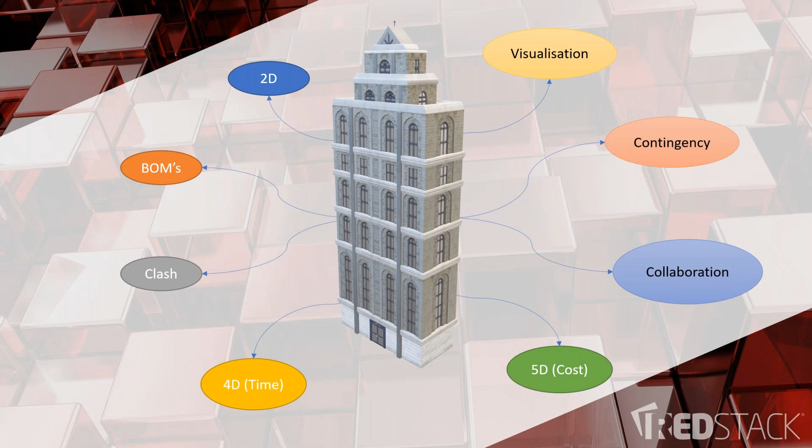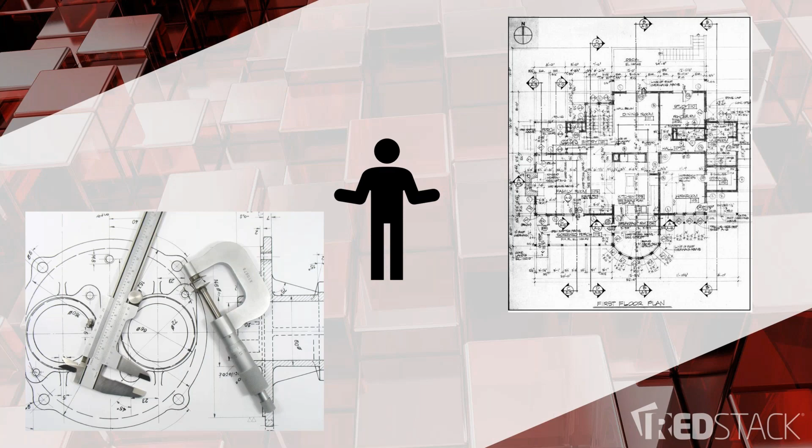With InfraWorks and Civil 3D, we can use Civil 3D to import the InfraWorks model, so all of the existing surfaces plus all the proposed surfaces will come over. The road alignments, roundabouts and bridges will come over, and that way your Civil 3D model is, in milestone terms, probably already 10 or 20% done instead of starting from zero. So for all the civil people on the call, have a look at using InfraWorks and Civil 3D to generate some of these models.

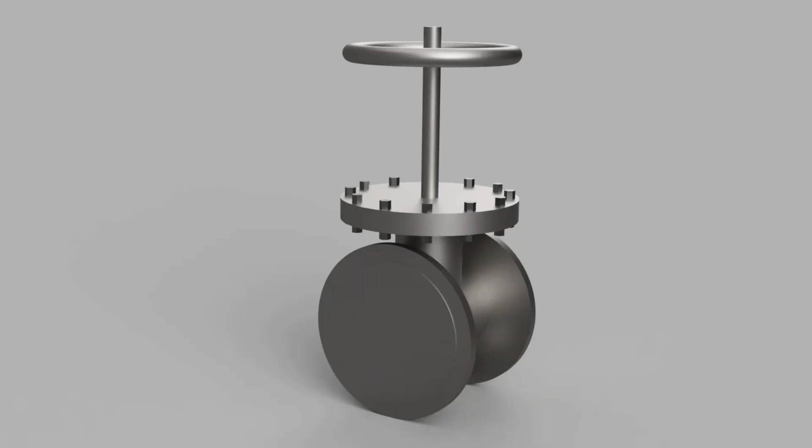This is a 3D model of a valve that I did in Fusion that was converted from 2D to 3D, and that is something that we will cover in the session in a few minutes. I will actually load it up and show you how that was done as well. I've got a rendered model there of a cast iron valve. I don't have the bolt details on the flange just yet, but once I model it, the 2D documentation for that comes out for free, basically.

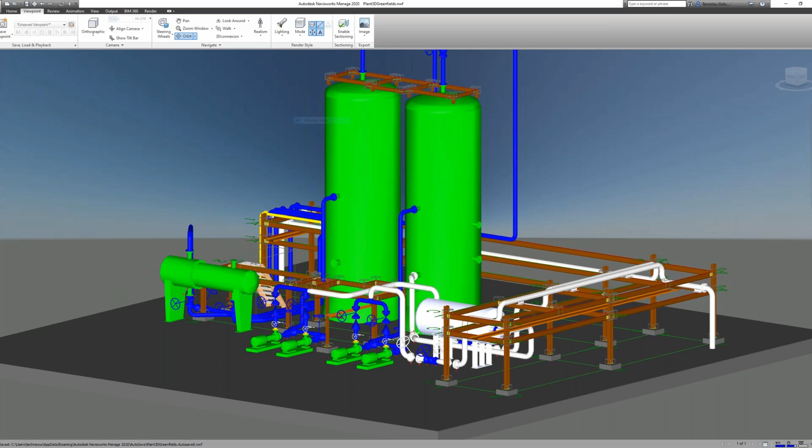And then for the pipers on the call, as I mentioned before, if you're using Plant 3D, we can link up all the piping, equipment, structural and MEP models all together. And subsequently, why we bring it into Navisworks is doing things like a clash. So you can see here that we found a clash in that piping model.

It's a piping elbow that's clashing with a steel beam there, and then from that we can determine through, you know, meetings or discussions, just going up and tapping someone on the shoulder, do we need to move that elbow out of the way, up or down, or do we need to move that steel beam?

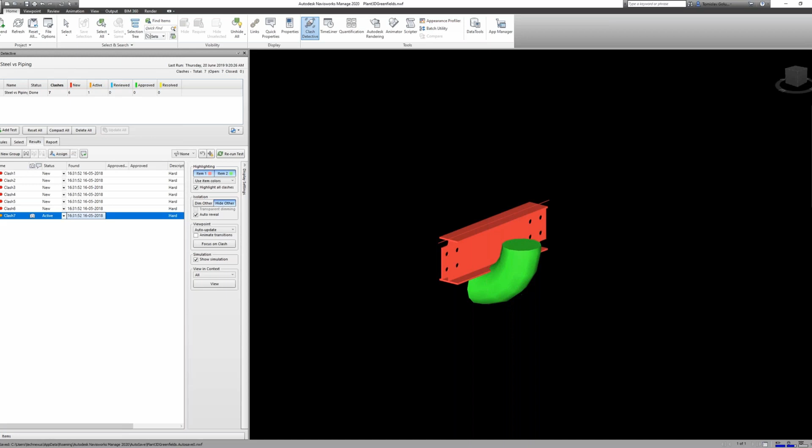So again, these decisions can be made before anything happens out on site, whereas if we weren't using Navisworks and we didn't pick up this clash before we went out on site, you might end up with a hefty bill at the end of the day, trying to get someone out there with a gas axe to cut and shut bits and pieces. So, excuse me. So let's jump into a live demo now.

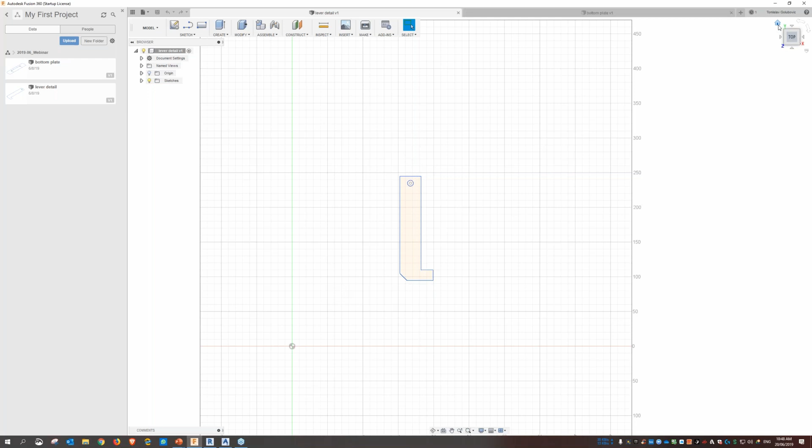So as I mentioned before, Fusion is one of the tools where if you already have items in 2D, we can go to 3D pretty much straight away. So I've brought in just a 2D drawing of a lever. Now, using some of the tools in Fusion, I can extrude this, and then I can say let's make it a 5mm thickness in here, and I can nominate directions, whether it's one side, both sides, and it's a new body. And now we have a 3D model of this as well.

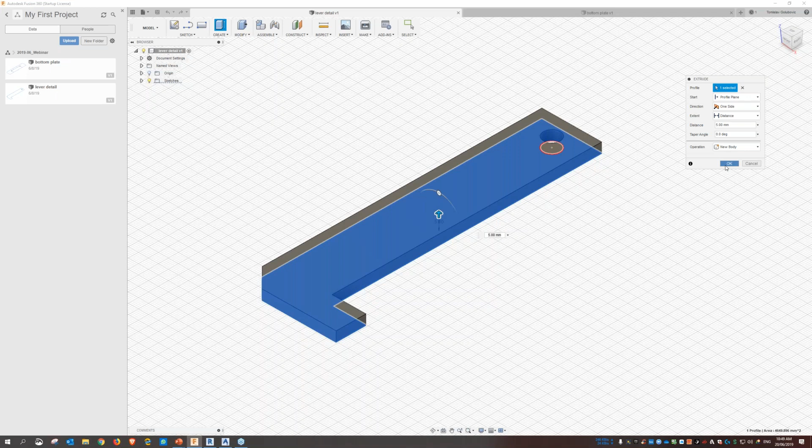There is also, if there is a need to do simulation in here, I can put loads on this, and that way Fusion will give me, I guess, the strengths and the weaknesses of this part depending on the loads and depending on what I need to do.

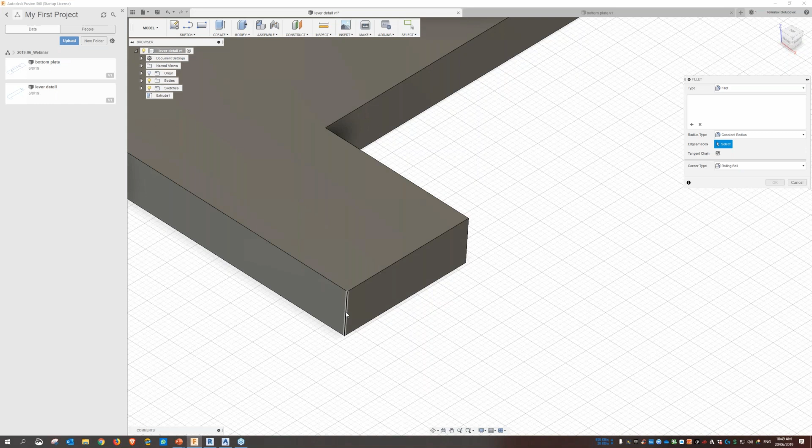So plus as well, I can just as easily come in here and put a fillet on this, so I don't need to play around with 2D drawings, and I can just use the functions here. I can type in a value of 5, and you can see that automatically that has filleted around there. And again, I don't need to play around with any 2D drawings. I don't need to worry about what's happening with other views.

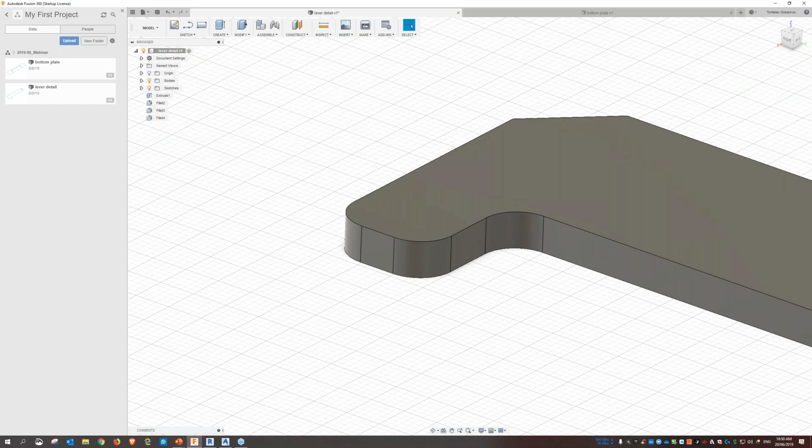So I'll just do the same for this other side, and I'll type in 5, and then I'll do another one again just in here as well. So I'll put a fillet in here and make that 5 millimeters. And you can see how quick and easy that is to generate and to produce, and subsequently we can make a drawing out of that as well. So I'm just going to close this one off.

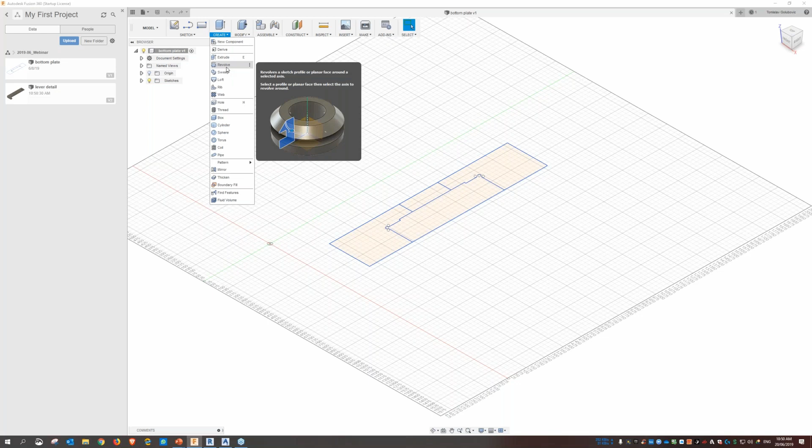And then this is, again, a similar sort of thing. I've got a 2D section of an object, and we need to revolve it. So under the Create tab, I'm just going to go Revolve, pick the region that I need to do. And actually, before I do that, I just need to do a sketch line. So I need to put an axis.

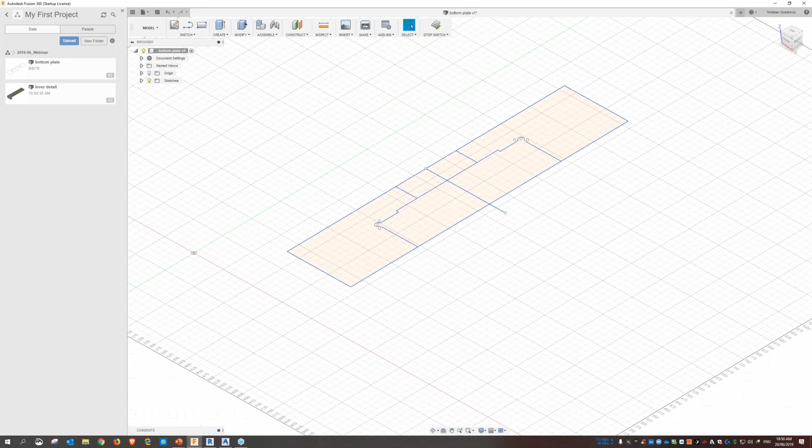So I just need to draw a line through here, stop the sketch, and then I need to jump into the revolve, and pick what the axis is, and then you can see there that we do have our 3D model of this bottom plate as well. So subsequently we can make a drawing out of that. And to show you that, I'm just going to save this.

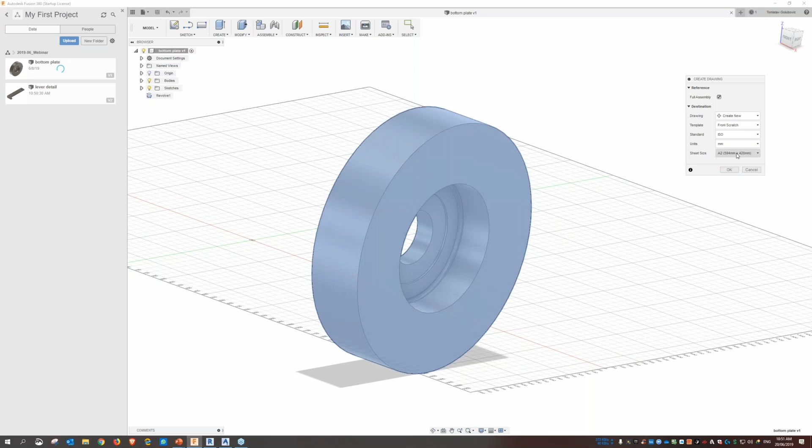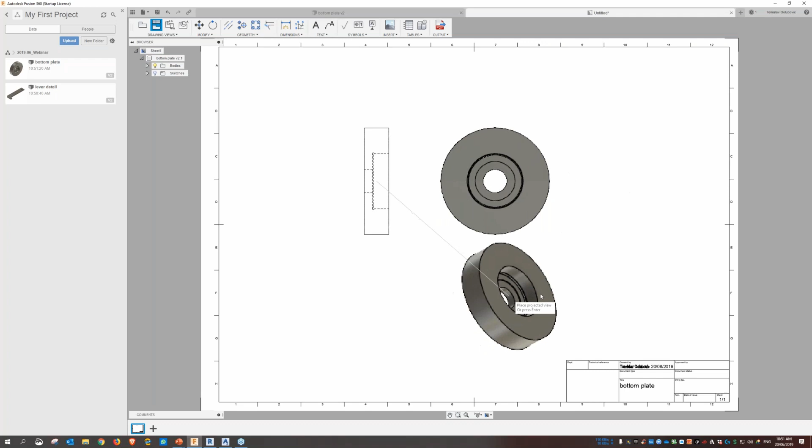And then you can see here new drawing from design, and I'm going to put it on an A2 sheet. And then Fusion's going to ask me where the views are, so what the base view is, and any projected views as well. And from that, you can see that once I place these views on here, I can do an isometric kind of view there as well, and then we can go through and dimension and name them there.

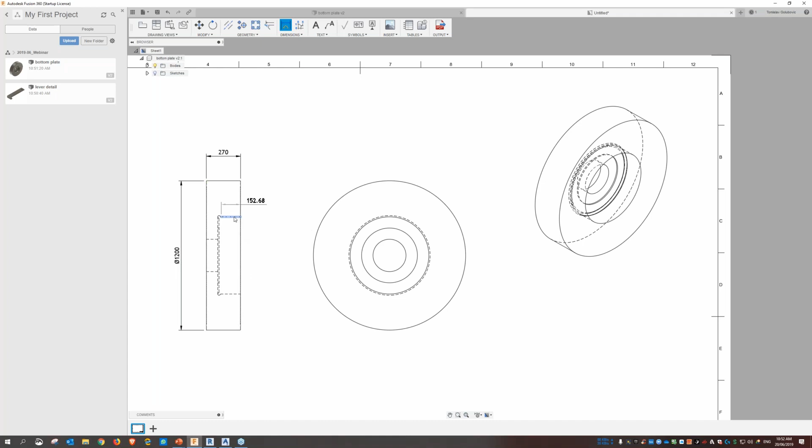And you can see we can set up all of the different options, so whether we want to see the hidden lines or not, we can just move them around. We can also draw center lines, center marks, patterns, dimensions, so I can go through and just start dimensioning those. And you can see, because it knows it's a cylinder there, we've got all of the values, like it's put in the diameter symbol in there as well. And then I'm just going to save this, and I'm going to call it bottom plate drawing.

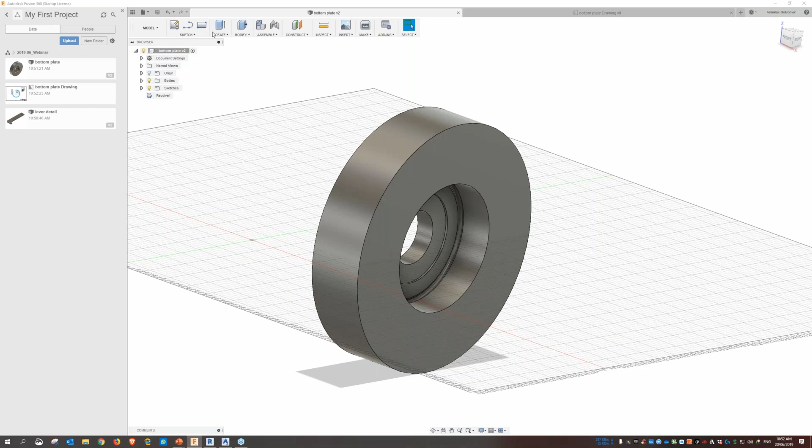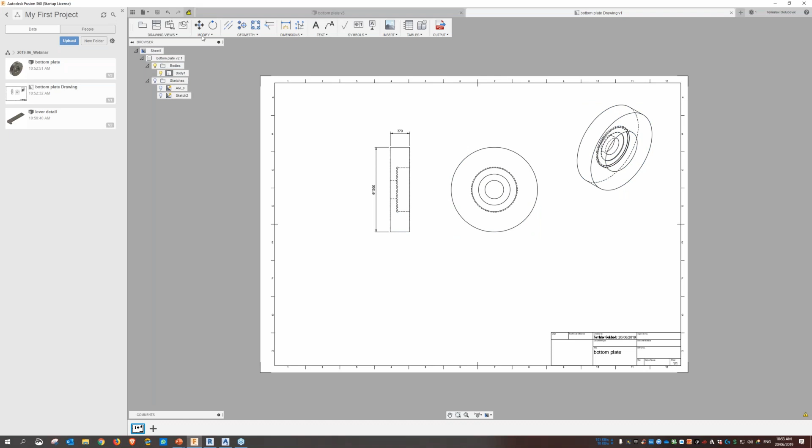And then if I do go back, let's throw in again, let's put a fillet on this outside edge here, so 5 millimeters. In the scheme of things, it looks quite small, but you can see there's a warning down here. It says we can update the model. So you just need to go through and update them. Oops, there we go. And then that way we can see all of the latest changes.

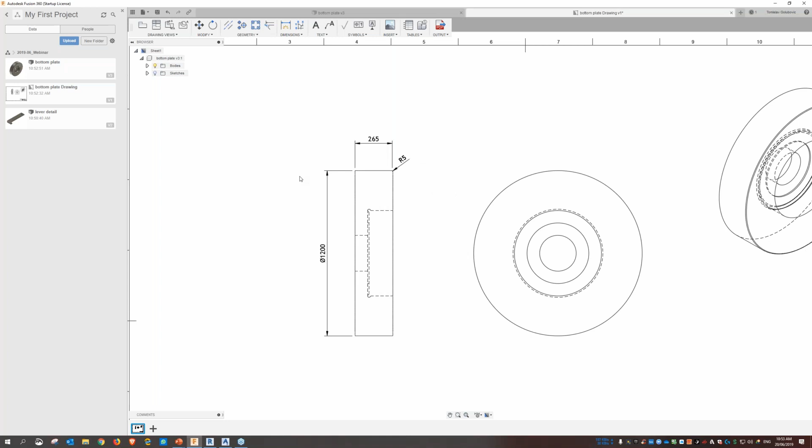Okay, and you can see here on this view that the fillet has appeared on the drawing, and let's see if we can grab that as a radius, and you can see that it tells us that there's a radius 5 fillet on there as well. So again, think of this 3D model as your central source of truth. Whatever we do to this, our drawings will follow suit and they will update as well.

But also, don't think of it from just a drawing phase. If you're a Fusion user, you've got the simulation, you've got the manufacture workspace as well. So if it's something where you're doing CAM, we can generate the tool paths for this if it was something that needed to be utilized for that. So that's for the manufacturing space.

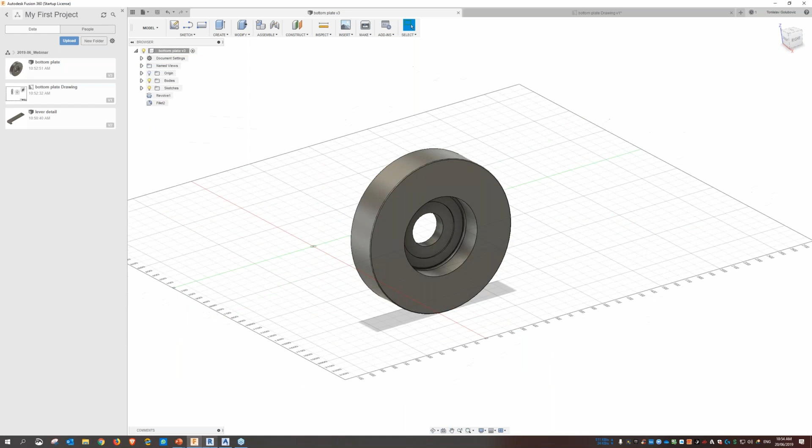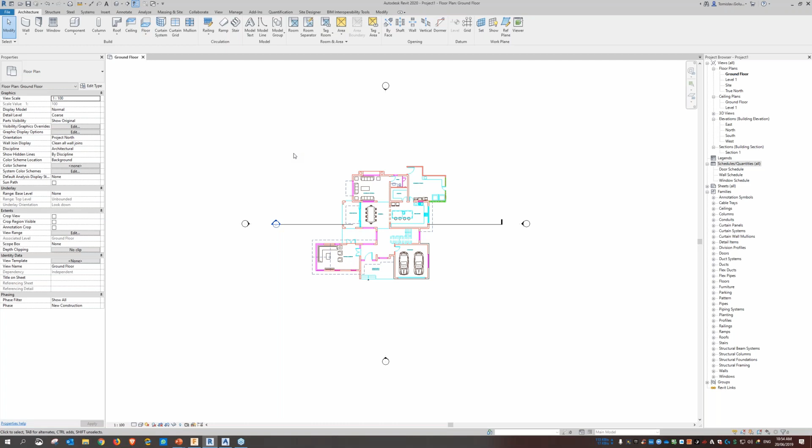For the architectural space, so for any home builders or anyone in the home, building or architectural space, anything to do with Revit, and this can be on the architectural, the structural, or the MEP side of things. This here is just basically a 2D house plan that I brought in, and you can see if I rotate it around, it's completely flat. It was done in AutoCAD. There's nothing special about it.

But if you are looking to go from AutoCAD and you already have these as AutoCAD files, it's quite easy to come in and start basically converting these into 3D. So with Revit, I'm going to place a basic brick wall 230mm thick, and we're constraining the height from ground floor to level 1, and my location line is on the exterior of this.

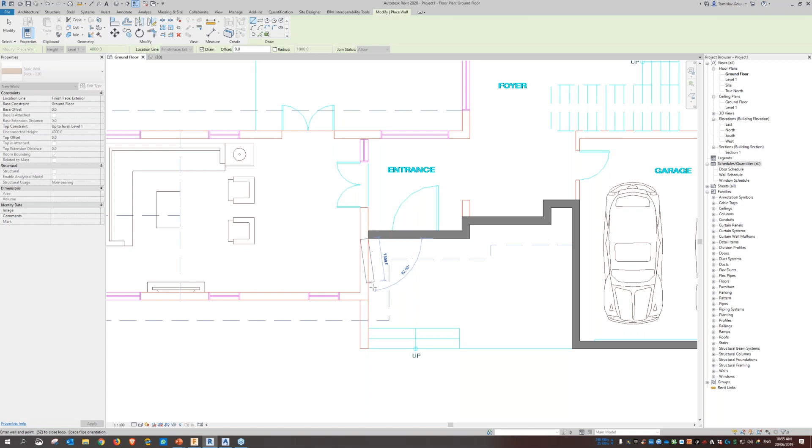So all I need to do is just start tracing around these lines, and you can see that we can slowly start building up a 3D model of this house. I'm just going to go through and do a few more points. You can see I don't need to put any fittings in here. I can just place the walls, because eventually we're going to place all of the windows and the doors separately, which is how you would normally do it inside Revit, and I'll show you that in a second. So I'm going to finish this wall here, and then I can do the same thing just to finish off the wall.

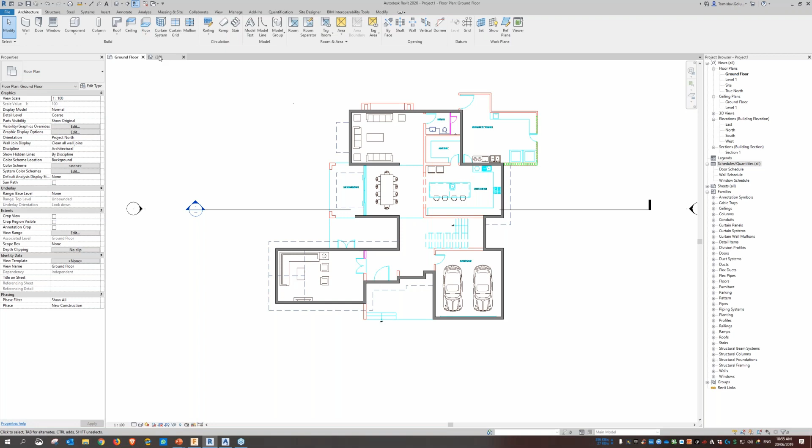Okay, and even though we've drawn it in 2D and you can't really see it, if I switch to the 3D view, you can see there's my 3D view of that house. And if I switch it to shaded, you can see that by default that Revit wall family already had the bricks on it, so you can see all of those bricks there.

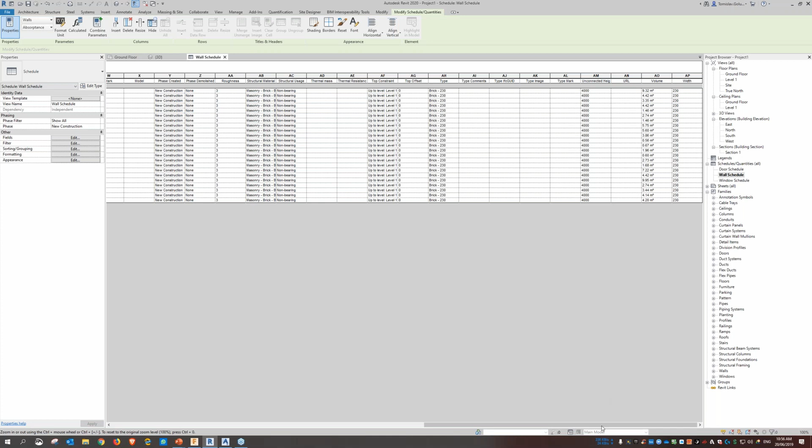Now, setting up schedules. In Revit, there are already some schedules in there, but I've set up a wall schedule. If I just double click that, I can see the area of each of those walls, where they are, what kind of family and brick, and what their functionality is, but also things like length, and if we scroll over to the right, we've got a volume in there as well. So again, you model it once, and then you might say that everything after that comes for free.

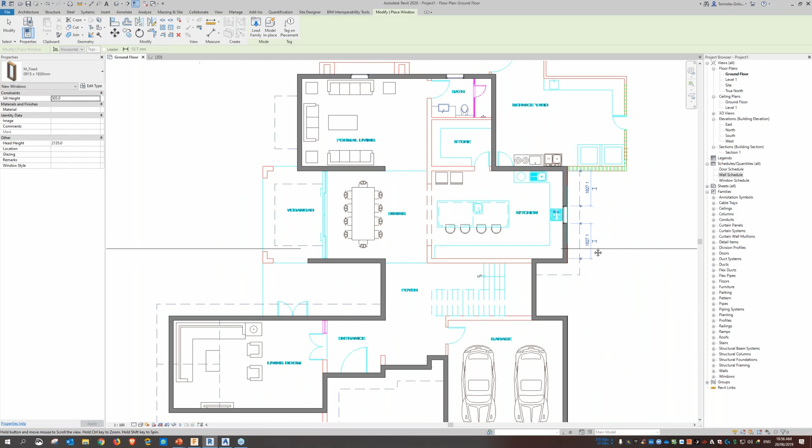So now let's throw in some windows. I'm just going to throw in a couple of windows just to demonstrate the ability here. We've got one in the kitchen, we'll throw one on this front, and we'll throw a couple here on this living room, and then I'm going to do the same with the doors. So we're going to throw in a front door, and let's throw one over on the garage.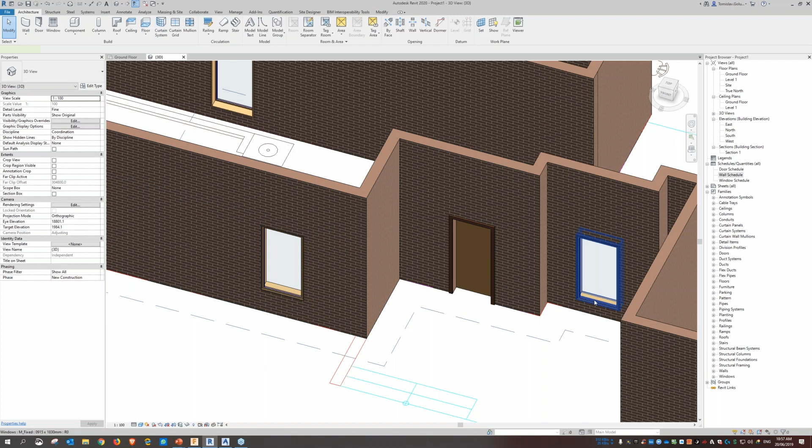Okay, so now that we've placed them, and I'll switch to 3D view, so you can see there again, they're placed at an arbitrary sill height, but if I decide to change that, if I want that to be 600 high, then you can see it adjusts itself to be 600 high as well, and I can do the same with this one over here. I want it to be 1200, and then there it is. So subsequently, all of the views will change.

But before I get into the views, if I look at the door schedule, you can see that it tells me that there are 2 doors, and they're both on the ground floor. And then the same thing for the window schedule. So we do have mark numbers with height, and obviously you can go through and adjust all of those as well. But the real power sort of comes in when we start looking at elevation.

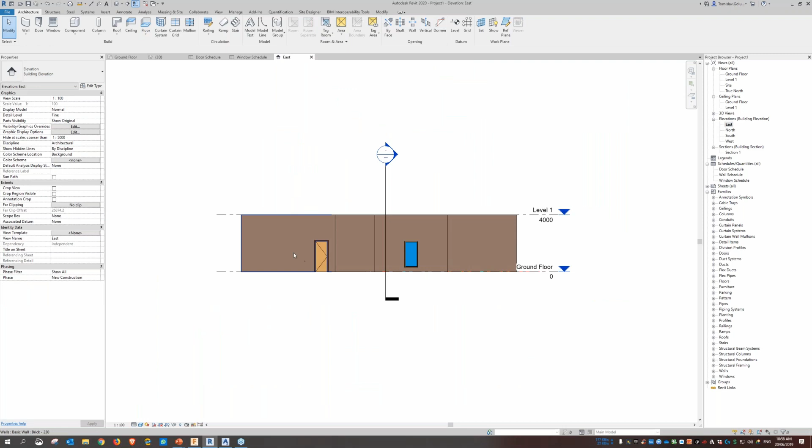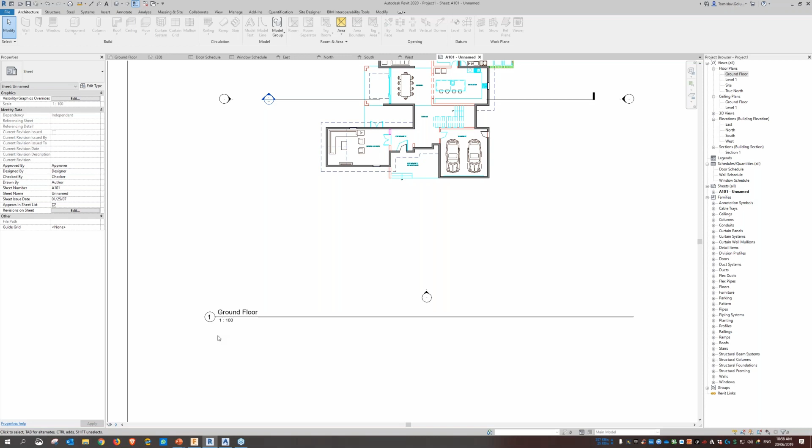So you can see here from the right-hand side, and I'll adjust the views. So you can see automatically the east view, north, south, and west is already created for you. So if we wanted to place these on a sheet, so if someone says, well, I want to see the ground floor plan, then we can place the ground floor plan, and you can see it's there at a scale of 1 to 100 on an A1 sheet.

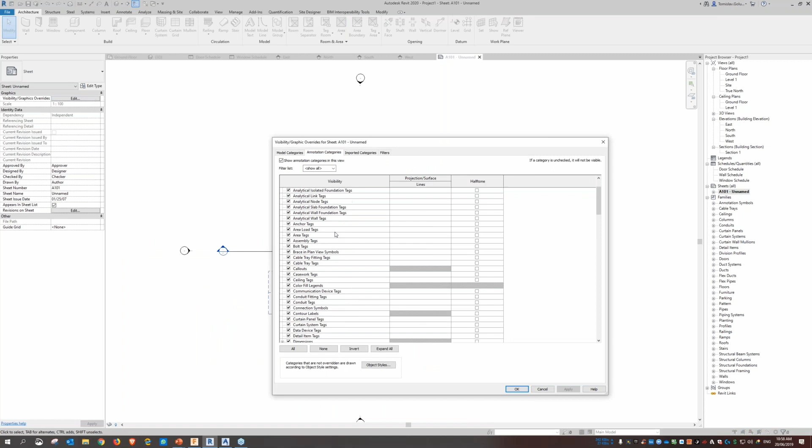So anything we do on this ground floor view will be reflected on the ground floor view on that sheet. And we do have things like turning on and off any tags or dimensions, so you can have one view with everything in it, and then each of these sheets will basically, like AutoCAD layers, turn bits and pieces on and off, and then as the model slowly gets built up, we will have a 3D model, our views, any sheets and our schedules, all basically done for free with the click of a button.

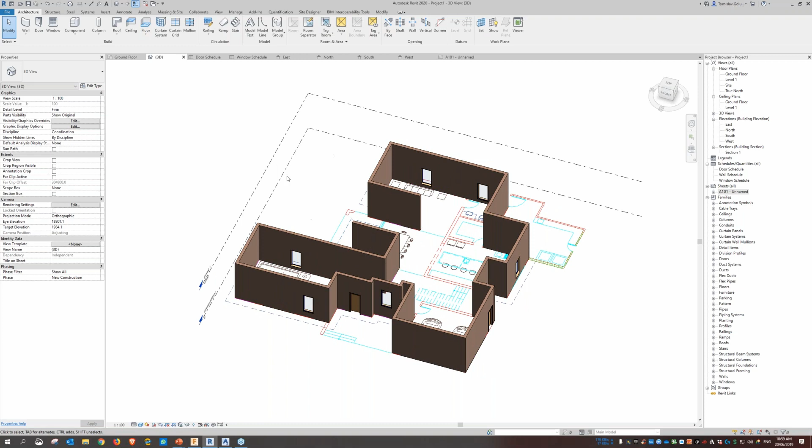So don't be too afraid of having a look at Revit if you're a house builder or in something sort of in the architectural industry. And then lastly, I wanted to have a look at Advance Steel. So for any steel modelers, steel detailers on the call, Advance Steel was a product purchased by Autodesk a few years ago now, and it's obviously made its way into the ecosystem.

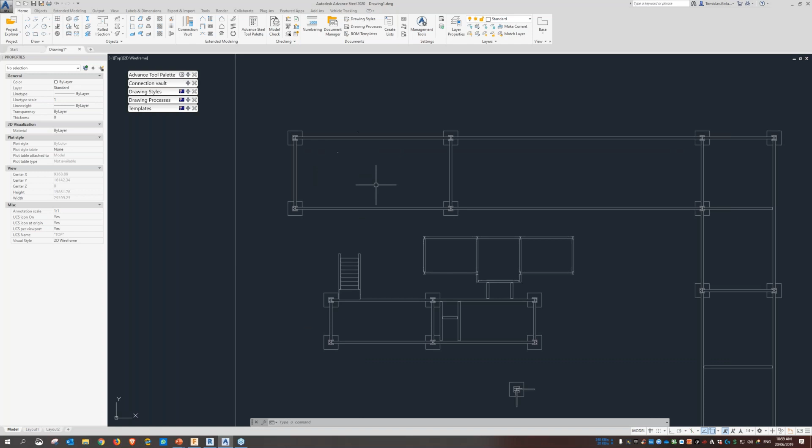But this is an example of a structural model that was made in 2D, and with Advance Steel, I can basically use this as a base to start modeling in 3D. So if I wanted to stick a column on here, I can just go to the column command, and I can say that it is placed in the middle of that point there, and you can see that even though it's not the right size at the moment, it's placed in the middle there. And if I switch to 3D, then I can see that column has come in there.

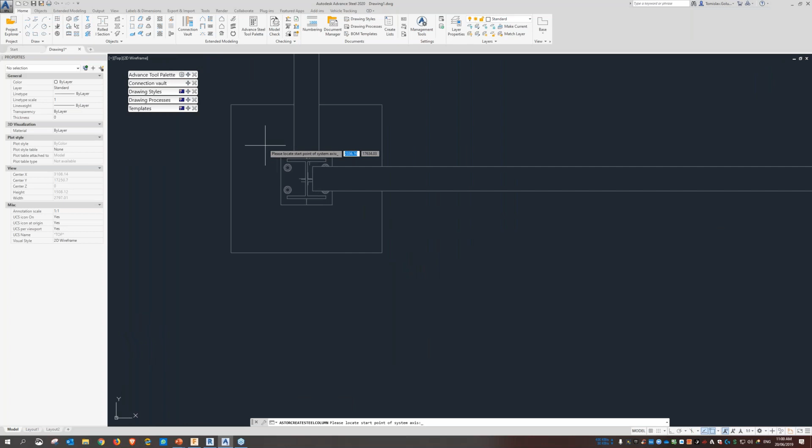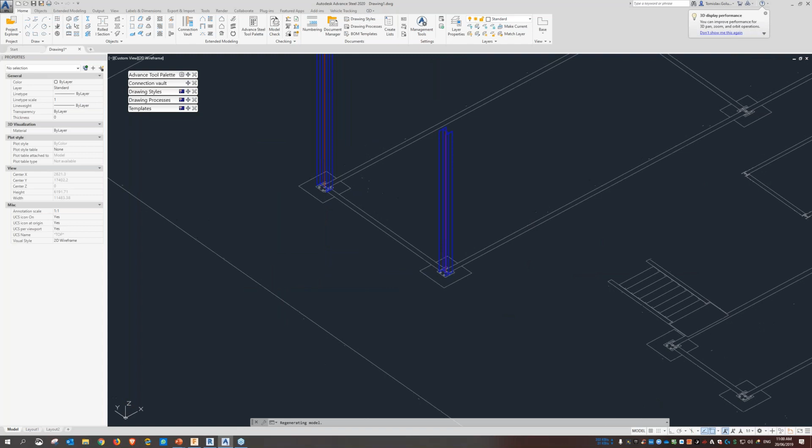So if I just do the same, if I switch back to my top view, I can do the column command and place it in the mid between 2 points, so I get the center of that column there, and you can see that it's done. And then I can adjust that and say that it is a UC, and that it's a 250 UC. That's a bit big. 200 UC, 150, and there you go. So it's a 37.2. Now, so I don't have to go back and change that one manually, I can do a match properties command. So I can match properties from this one over to that one there as well.

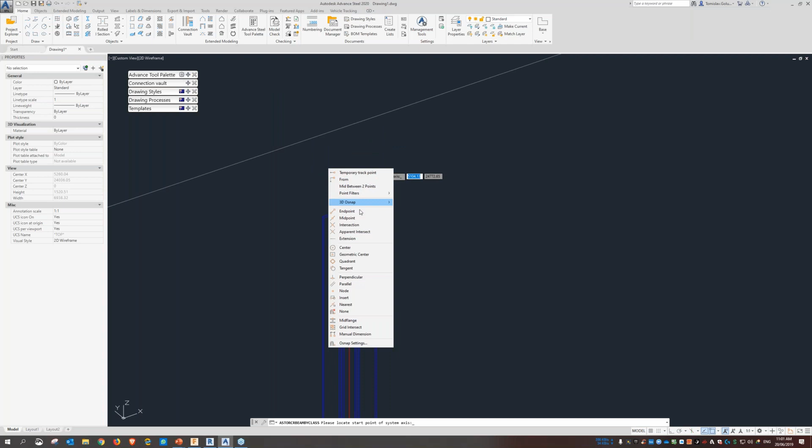And then what I want to do is just show a little bit more on what else we can do with this. So I'm not tracing over a 2D, but I can go from the top of this beam and run out, let's make it 3 meters. And I can place it at the top middle of that beam, and I'll do the same thing with the other one.

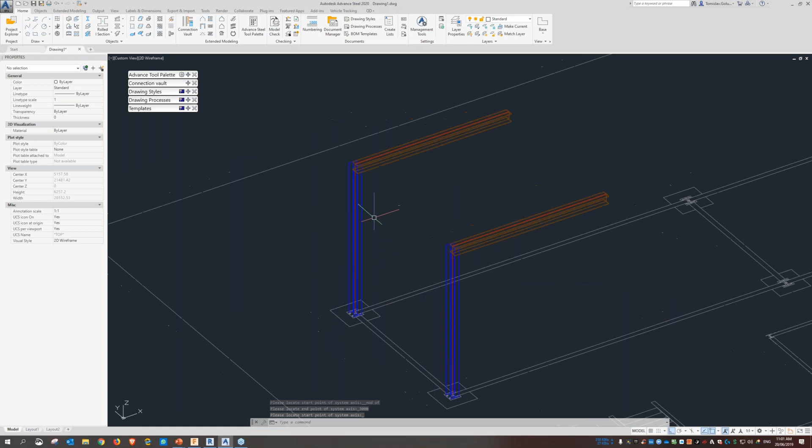And the reason I wanted to show you this was some of the power with Advance Steel, and again, this is not only limited to Advance Steel. The other tools have similar functionality where I can, and I'm going to switch this to conceptual mode, with my connection vault, go through and put a shear plate connection between this column and this beam.

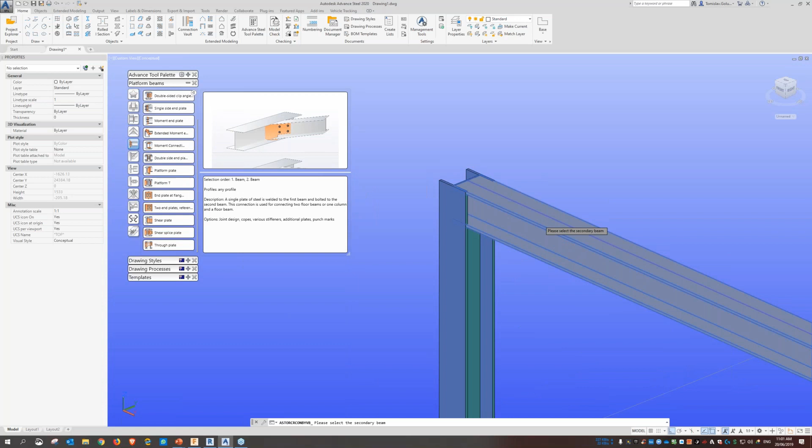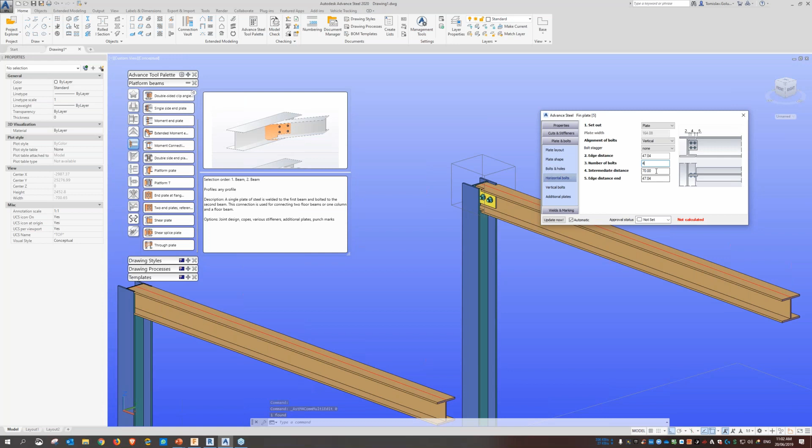Okay, and then Advanced Steel, the macros for it basically let me have all of these grouped in this intelligent macro, so all I need to do is double click on the macro box, and then I can go through and change. So with these horizontal bolts, if I wanted to have 4 in a row, then I can go through and just place it. So I don't have to worry about going back and drafting up and detailing this.

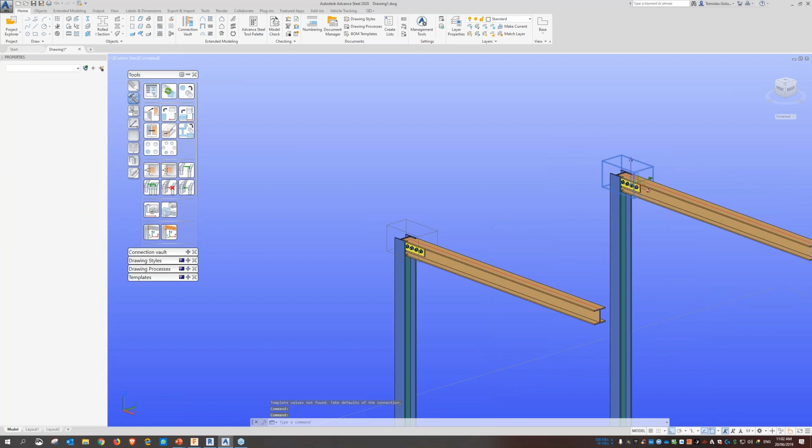And then what I can also do with this is I can group these in a parent and child relationship. So I can copy that over, but now because these two are grouped together, if I go through and change this horizontal bolt back to 2, then you can see this one over here has changed to 2 as well. So again, my productivity has just been boosted by the ability to have these linked together as a parent and child.

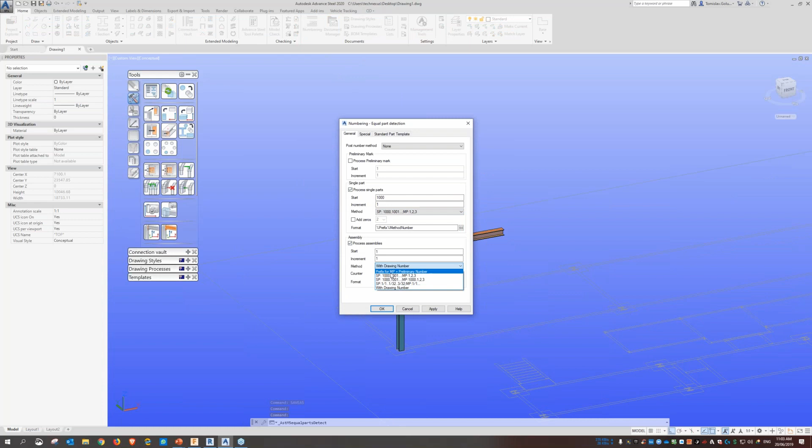But let's look at what we can do once we get into the documentation side of things. So with Advance Steel, we do the numbering of single parts and assemblies. And then from that, we can start generating assembly drawings automatically. So if I just say, give me all of the MP parts in there. So once that's finished, what we can do is the same thing for single part drawings. So I can say all single parts.

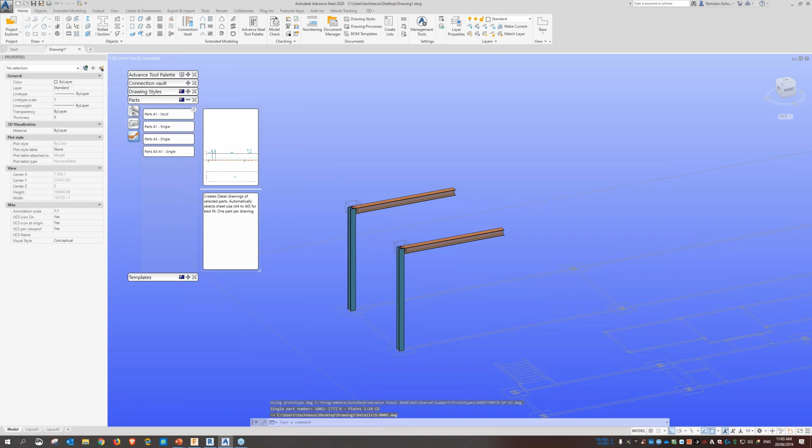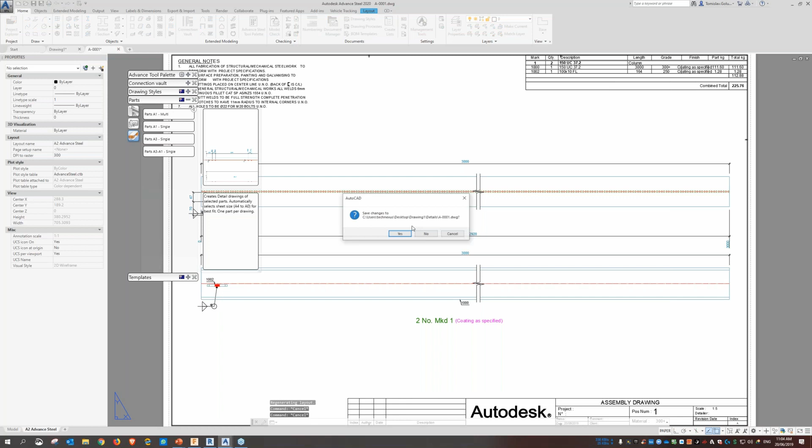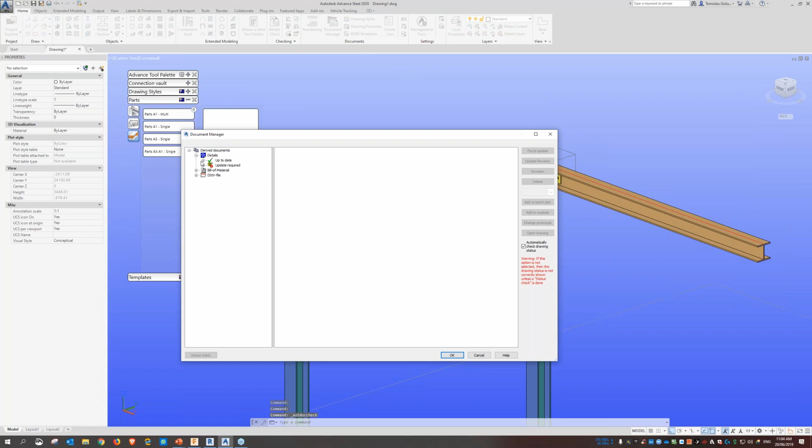Okay, and then it's very similar to Revit, I guess, where if we change the model, it does it a little bit differently, but at the end of the day, the model has been updated, and now the document manager tells me that because of that change, 4 drawings are affected, and I can just say force update. And what that is going to do is update those drawings.

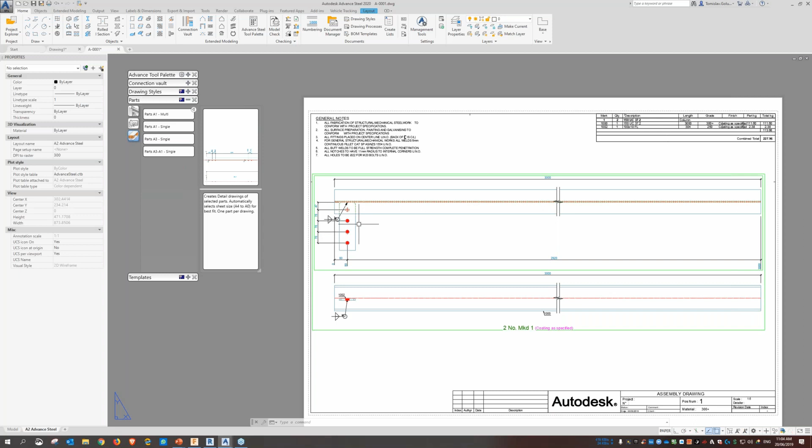And then from here, I can say, show me the assembly detail, and then you can see there that those 4 bolts are automatically put onto the drawing, and you can see that because of that change, it's now at 227 kilos as well. So you don't have to worry about going through and updating the drawings. The only thing you'll need to do is possibly tidy them up with some of the labels or some of the title blocks, but ultimately at the end of the day, it's sort of a one-click function.

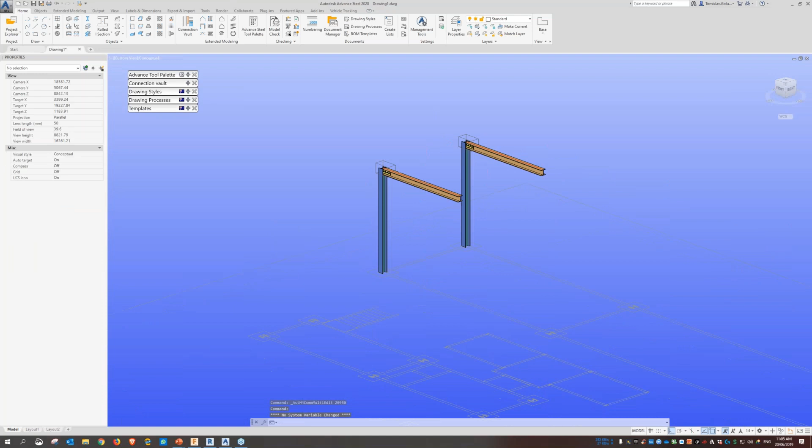And then lastly for this as well, like with Revit, I want to create lists on this as well. So then I can go through, give me a second, and then I can say from these BOMs, let's look at the parts list. So I can say, give me a full material list. Okay, and then there it is.

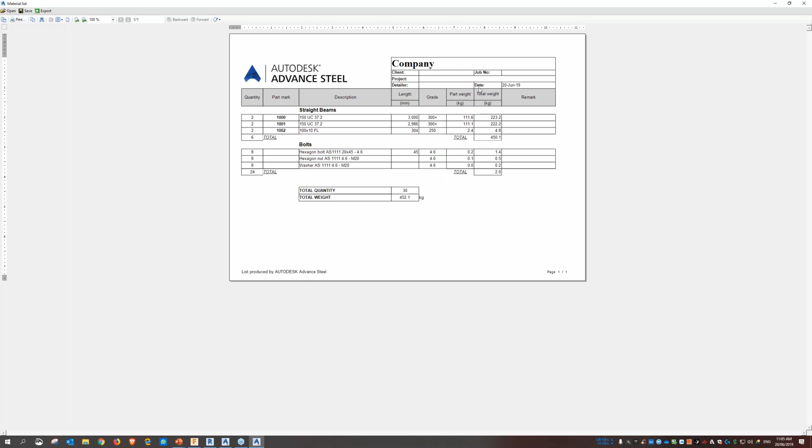So we can see that we have 2 UCs, we have two flats, and we've got the number of bolts, nuts, and washers as well. So again, because it has been modeled in Advance Steel, we don't need to go through and manually do anything. We can just click a button and automatically get a sort of tonnage report on our Advance Steel model. So, that kind of covers us for the demo.

I didn't mention a few things like AutoCAD Electrical and Inventor linking together. You know, AutoCAD Architecture and Revit, AutoCAD Mechanical and Fusion or Inventor as well.